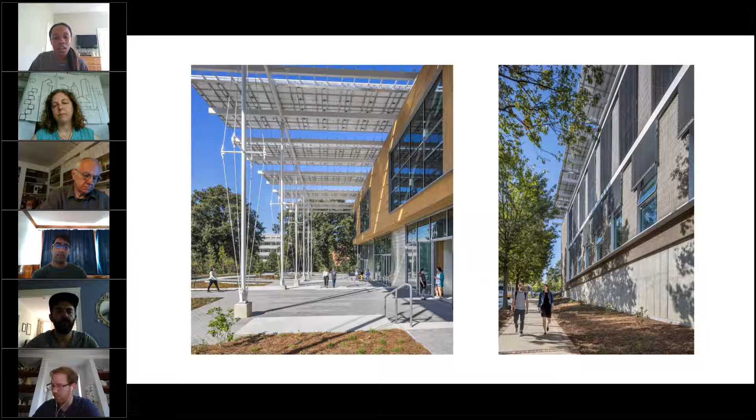A little bit about the Living Building Challenge, if you're not familiar: it's based on biophilic design, taking ideas from how a flower works in the environment - taking energy and resources from the environment, but also giving back. The Living Building Challenge defines a couple different markers that they want to hit.

Oh sorry, that's my home phone.

So there are a couple different markers they want to hit: place, water, energy, health and happiness, materials, equity, and beauty. Mass timber construction really hits on the material side of it and part of the equity side - I can talk more about the equity side if people are interested. That's probably what I know most about regarding the Kendeda building, but the mass timber part is really interesting too.

The Living Building Challenge really seeks to, instead of just being up to code and standard and sustainable, create positive environmental impacts - taking resources and materials that are brought in, but also giving back to the community around them, whether that's monetary value, programming, or the construction and the type of people working in and around the building, really helping to build the community.

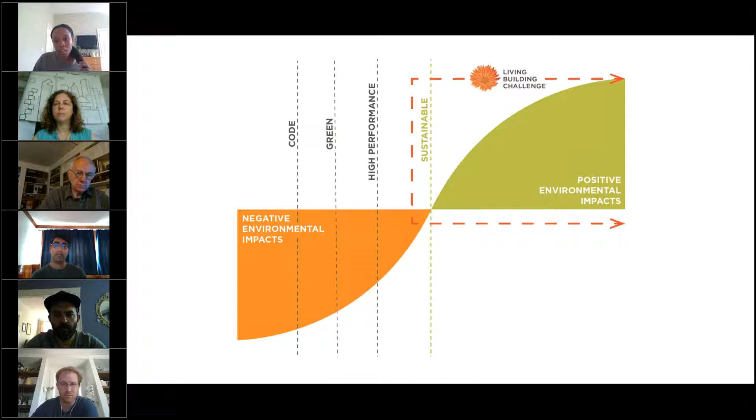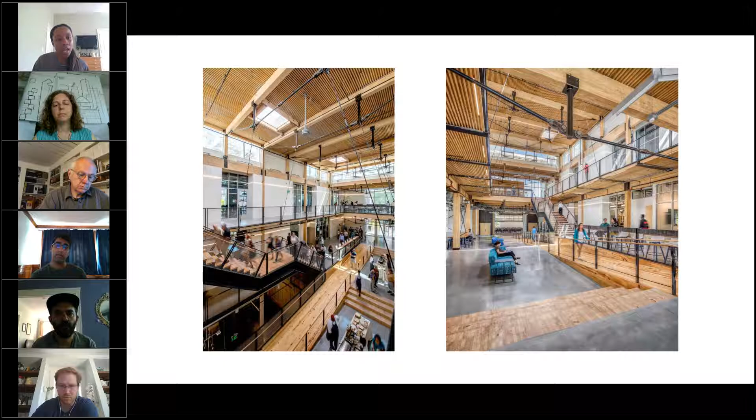Here are a couple pictures of the inside of the Kendeda building. There's a lot of wood - it's mass timber construction, and a lot of the wood pieces are reclaimed and recycled wood, which I'll get more into later. That was one of the imperatives the Living Building Challenge wanted to achieve - that a lot of the wood would be reclaimed or locally sourced.

And two other imperatives: responsible sourcing and living economy sourcing. They want to make sure the construction materials are local, brought in from a certain distance from the building, to make sure they're actually putting money into the economy and the community. Then living economy sourcing means the people actually building the building are local as well.

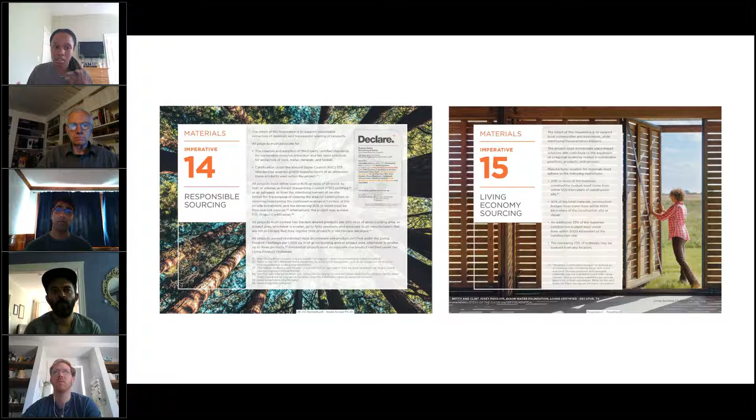So it's benefiting the community both economically and socially, and overall it suffices for the Living Building Challenge requirements.

The last imperative in terms of materials is net positive waste. This defines that at least one salvage material per 500 square meters of gross building area can be adapted or reused from an existing structure. For example, in the Kendeda building, Atlanta is a hotspot for a lot of film sets, so a lot of salvage materials come from the fast construction done for film sets. They bought wood from people in the film industry and used those pieces in the Kendeda building.

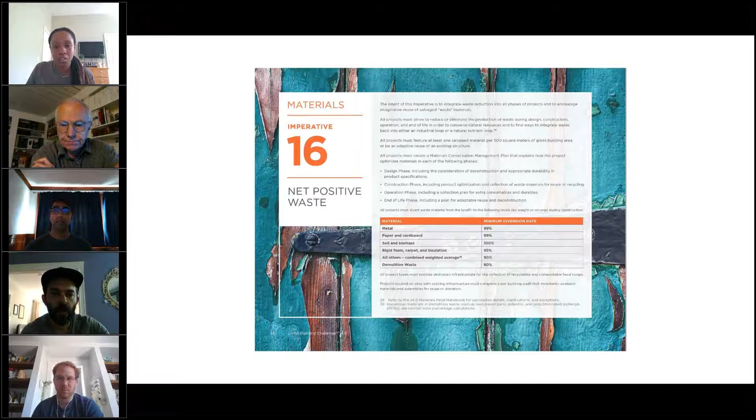These are a couple pictures of some of the construction work on the Kendeda building. They used horizontal and vertical glulam, with some steel and concrete structures for structural support, but most of the square footage used mass timber for construction.

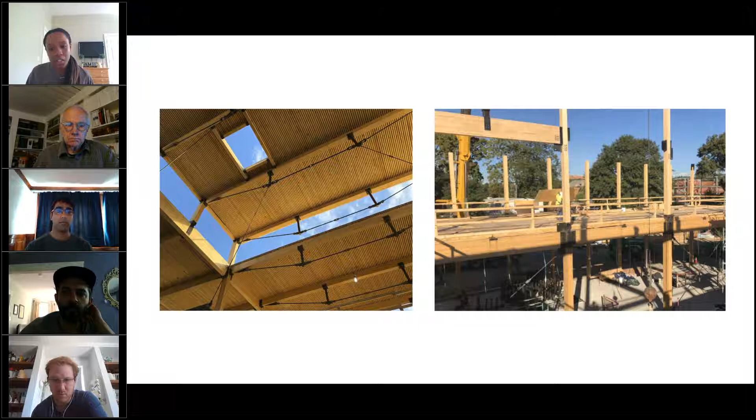A little bit about the cost and carbon impact: this diagram shows that concrete versus steel versus timber is a bit higher in price per square footage, but the tons of CO2 emitted is significantly lower than concrete and steel.

What's really interesting about the Living Building Challenge overall is that they understand that even though there's maybe more upfront cost with responsible sourcing, the long-term health benefits and active community and economic benefits outweigh the initial cost by a landslide. That's what they're trying to promote with mass timber construction in the Kendeda building.

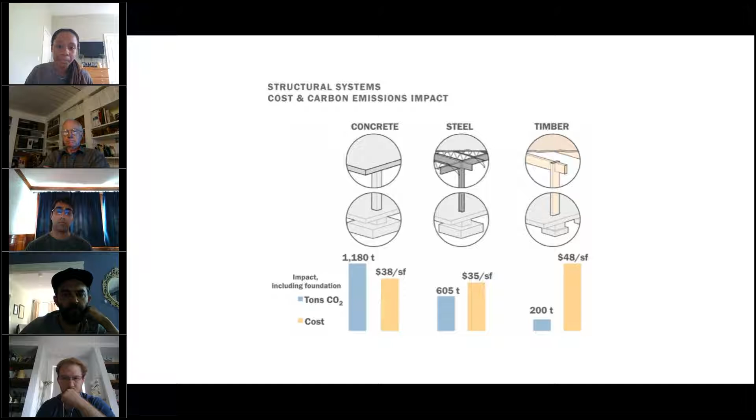So the structural engineers ended up making paneling from 2x4s and 2x6s, creating an interesting design that's visually appealing but also used responsibly sourced materials. They used FSC certified materials from local Georgia forestries, and the other 2x4s and 2x6s were salvaged pieces of wood from the Atlanta film sets.

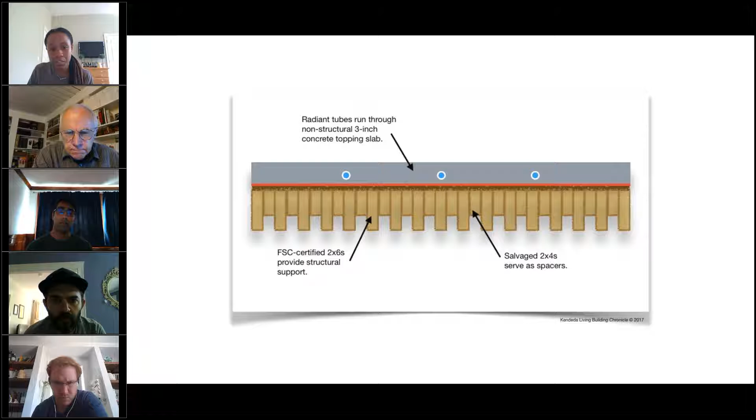Another interesting equity point: instead of using typical glulam construction, they had to nail all the boards by hand, so it was very labor intensive. They implemented a Georgia Works program, which allowed people facing homelessness or job insecurity to transition back into the workforce. They used that program to get a lot of manpower to help construct these things, which also promotes a different level of understanding and investment in the community.

So even though it's on what people would call a generally closed campus, a lot of people from outside actually had a hand in building the Kendeda building, giving them a personal connection to what the building stands for and what it's trying to achieve, promoting an equity component that not a lot of us think about.

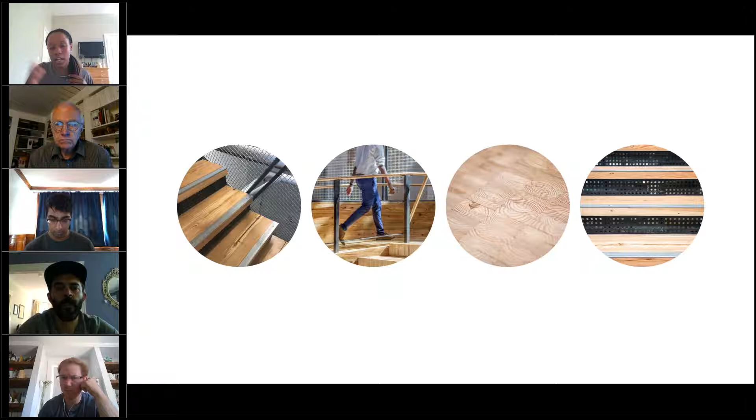The extra wood was salvaged and used - the bigger beams were used for staircases, there's a ramp as a main feature in the building, and a lot of the wood pieces were used as stairs, so you can see the facing and the wood grain throughout the building.

But yeah, that's all I have. I could talk more about the equity components or answer any questions anybody has.

Yeah. That's awesome. I think you should talk more about the equity piece - you were telling me a little bit about it. I think it's interesting. Yeah, of course.

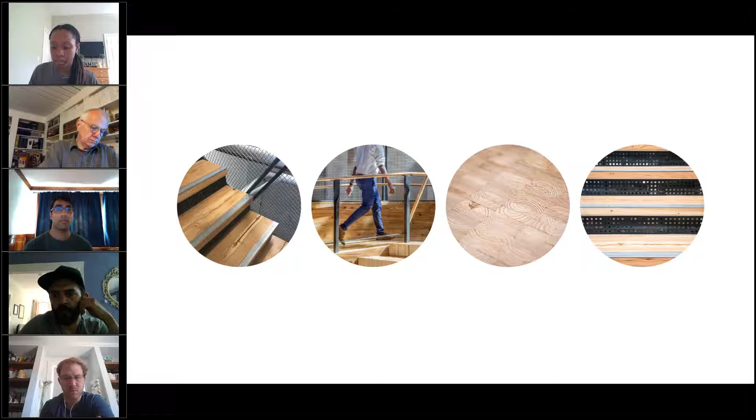So part of our research, we looked at what was achieved in terms of equity and what wasn't achieved. A big part they want to do, especially with the Living Building Challenge, is get everybody at the table early on - constructional engineers, students, professors, the designers, architects, everybody.

So a big part of the equity component was creating space for everybody, even though it is a campus and you would think we're going to have educational spaces specific to sustainable design. They really wanted to make sure it was open to everybody. So a lot of the classes held, they have petitions every semester to make sure the classes are large lecture classes. They get a lot of students who are in prereqs like general chem, general physics, so they can get a lot of students and foot traffic in and out of the space to promote this type of equity and promote interest in sustainability.

They also look into signage, so they could talk about and have other people understand the construction elements of it, what went into it, the people who built the building, that was really important to them. So the signage is not up yet, but they're working on graphics to put up.

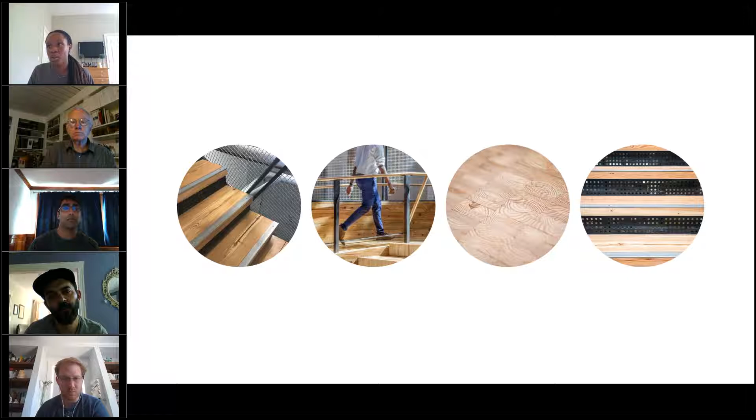But also just social media wise, they really wanted to promote that this is a building usable by everybody. So they wanted to promote the flushable toilets, the foam flushing toilets. A lot of people just come to use the toilets, and that brings a lot of foot traffic in and out of the space, which is really important in promoting equity from that side.

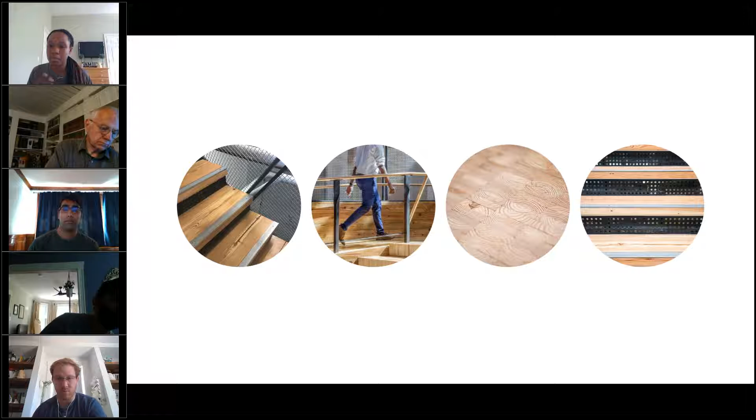And there's some setbacks from doing that. They want to make it more exposed to staff, it's not really that staff friendly, but they want to do more to attract some older and professional individuals. They want to do more scheduling for outside community partners. Right now they have a K through 12 program housed in there, so Atlanta students can come and learn in that space so they can feel like that space is their own as well. But some of that, they have a problem with scheduling wise, because it's a campus, they can only schedule one semester ahead of time. So that's something they have to figure out in terms of how to promote more diversity in programming.

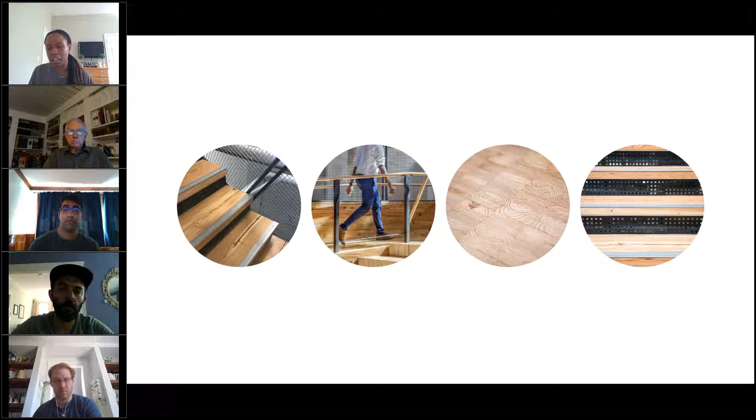And in terms of water equity, they use all the rainwater and filter it out on site, which prevents a lot of runoff, because Georgia Tech is a fairly hilly campus. A lot of runoff would happen into surrounding neighborhoods, so that prevents some of the runoff happening in those neighborhoods. At the moment, they're trying to make sure it can run without city water. Right now it's running with city water, so hopefully once certification happens, they can switch on and switch off whenever they please in order to achieve that kind of water equity component of the building.

So that means they're doing black water recycling. The foam toilets, if people aren't familiar with those, are basically composting toilets. It's like a regular toilet, but they have foam that runs down the sidewalls and primes it so that after you do your business, you just shut the lid and that's it. It sort of continuously flows, the foam. It's a bio-friendly product, and they have a whole composting system in the basement.

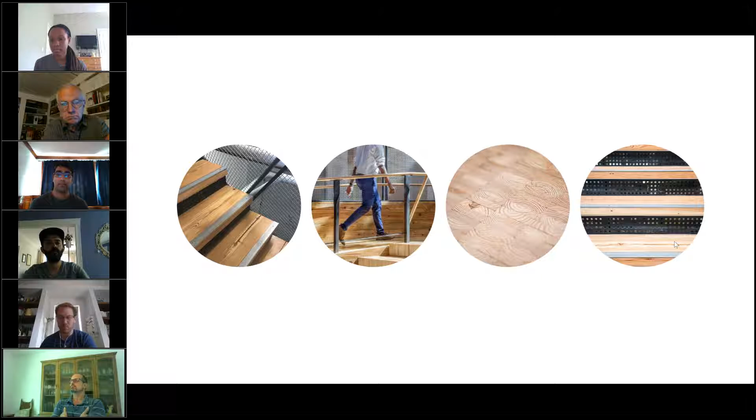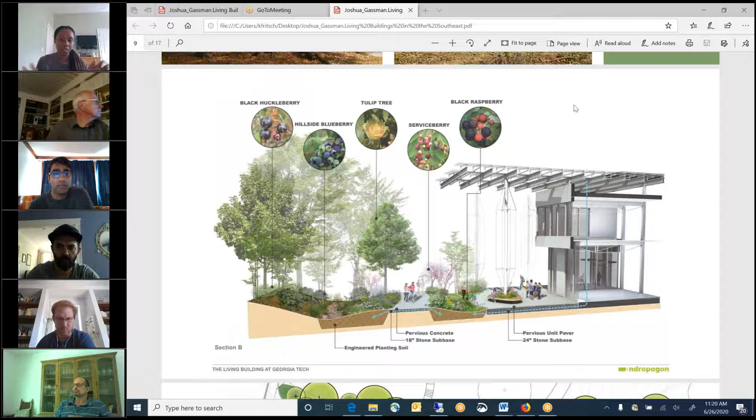In terms of the landscaping, in order to fulfill the Living Building Challenge requirements, they have to create an eco commons. So their master plan is to create an eco commons right next to the Kendeda building, and then throughout the campus to have more green space, but have these porous pavements so they can recycle more rainwater, because there's a lot of runoff, especially when it rains a lot.

It's very hilly, so having a way to take this water and use it for something else instead of overloading the stormwater systems. The solar panels run north-south in this image, and that's the porch. That whole plaza area to the north is the porch, and there's this huge existing tree that they worked around. Significant old tree, I think they show it there.

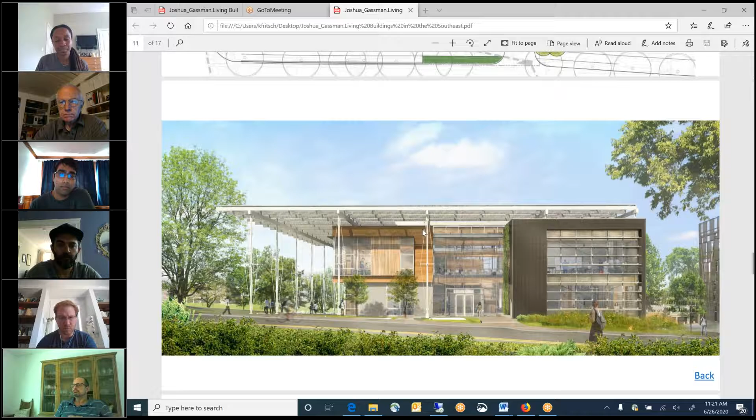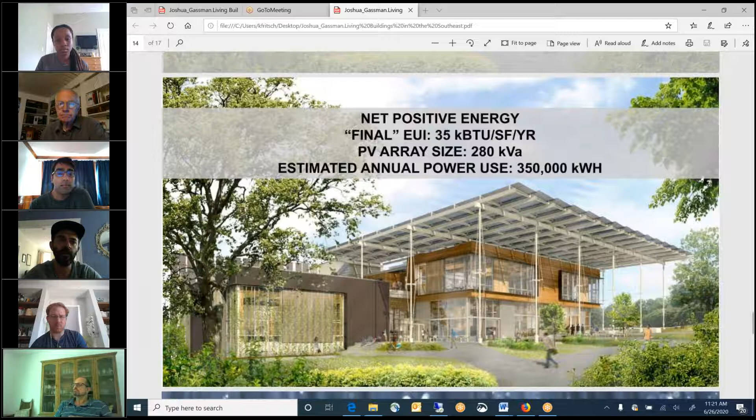Hey y'all, I have a quick question about the lamination process you were talking about, saying they had to change the adhesive when laminating boards together. Do we know what type of adhesive was used? That's a good question, I could look and see if I can find information on that, but I don't know what type of adhesive was used.

Did they just nail it, or did they do both? So they just nailed it. Oh, I thought it was an adhesive that they used. No, they weren't allowed to use adhesive because it was a red list item. So they ended up nailing all the boards together to create that pattern with the 2x4s and 2x6s. Got it, thanks for clarifying.

Another interesting thing is one of the petals requires you to grow food on the site. So they have a roof garden that has some kind of berry, and I can't remember what else, Jordan. Yeah, I think there are blueberries and other types of foliage. I don't think there are any other fruits, but I know there are blueberries up there.

Then this is a green screen they have, and behind that, this huge volume is the large classroom. It's flat seating, tables and chairs sort of venue, but you can also set it up as rows of chairs as well. It's not a stepped format.

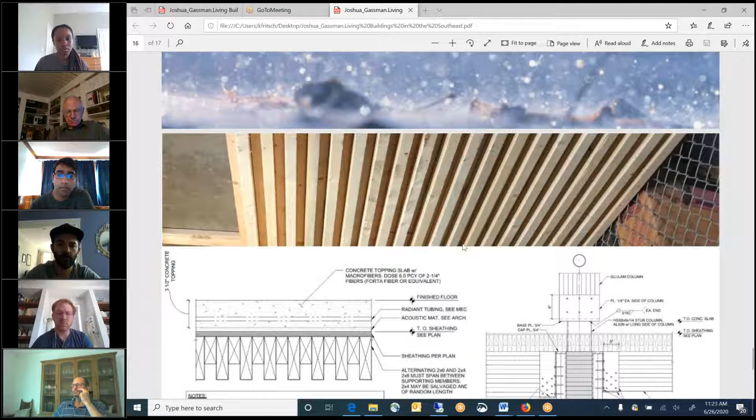So is it completely powered by the solar panels on the roof, or is it still drawing back? Yeah, I have a slide on that. So it does have to be net positive. You go through and reduce your loads as much as you can, and then they're supposedly going to be neutral, right?

Sometimes the living buildings in general end up creating more power than they thought, or using less than they thought. But I think, Jordan, they still have quite a few months to monitor. They have to monitor for at least a year, right? Yes, correct. So this is the goal, their final EUI is 35, and hopefully that will match their output.

It's pretty well daylit, so I can't imagine there's a lot of energy use in the building in terms of labs or equipment. It's pretty minimal. Their classrooms are all daylit. And I think naturally ventilated too, right? I think, but the humidity is an issue.

I can't remember about the windows systems, I'm blurring together too many buildings. Is it a radiant slab everywhere, or is it just in those sort of elevated decks with the concrete?

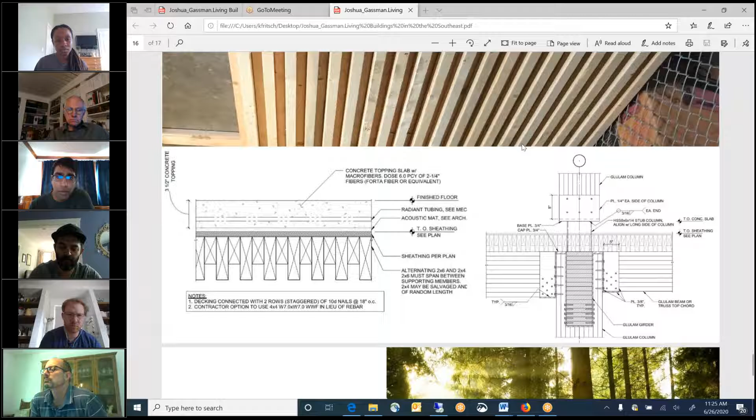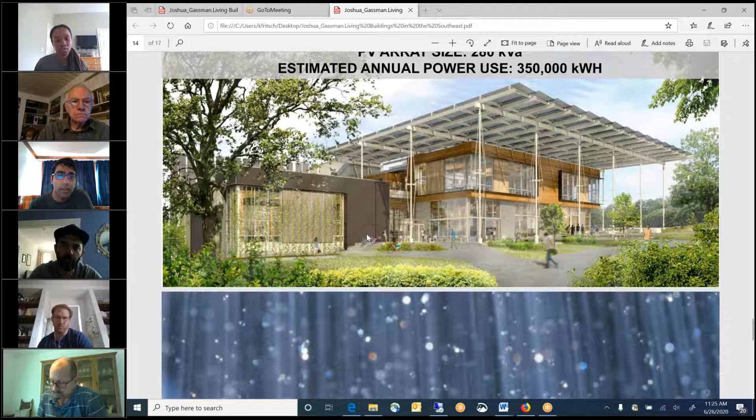So what I learned is these are their classrooms on either side of that atrium space, and offices and classrooms down here as well. That's all radiant slab. This one big classroom volume is a different mechanical system, it's forced air from the top. And I think because it's slab on grade, I can't remember the reasoning why, but it was a different system on purpose.

It might have been the load. Actually, you know what it was? I think it was the ventilation requirement for the amount of people in the space. They had to have a different system anyway, and I believe it was a heat pump. I can't remember, but there's a huge fan in the ceiling that they blocked out. It's kind of an interesting detail, but I'll have to look up more information on that. I do remember that it's a different system.

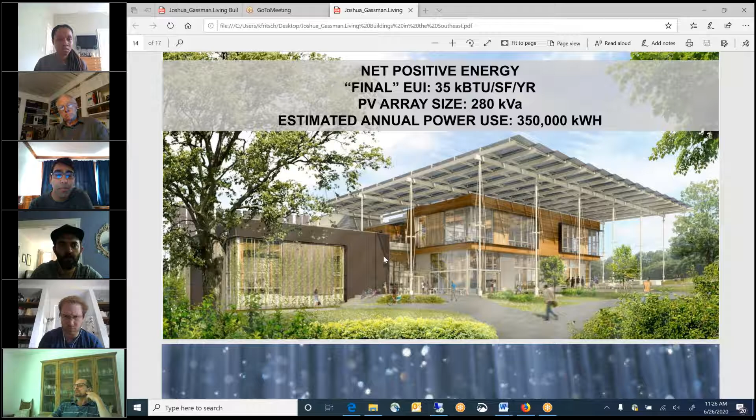So when they submit this as a Living Building Challenge, it's two separate buildings kind of like that, but it's probably really just one project, and they're kind of using the two. Well, it is very connected, it doesn't feel like it, doesn't seem like two separate buildings, and you often have zoned mechanical systems anyway.

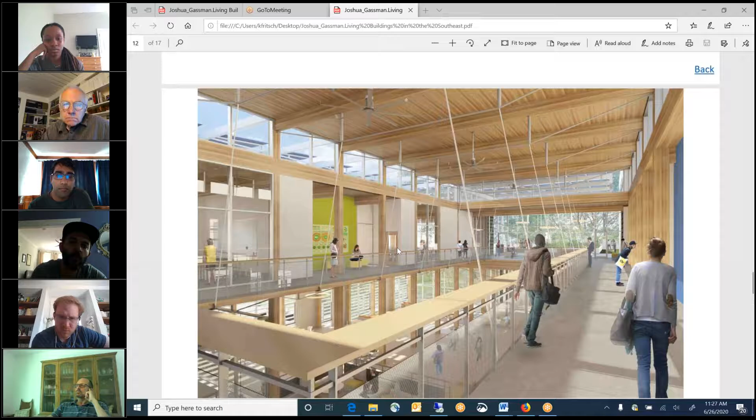So it's all one envelope, right? That classroom opens up to this hallway space. I don't know if they have an image of it, but it doesn't feel as separate as it looks in this picture. It's just basically one story, right? That's the whole classroom, and it has a movable wall in it, and it can open up to be more of an event space.

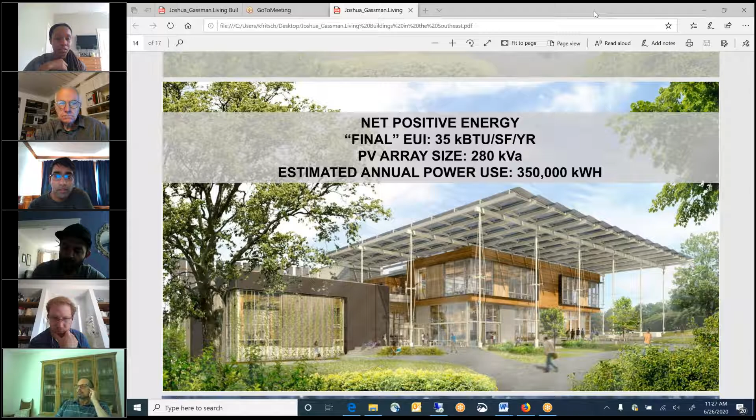So did this building get the full petal thing, right? The whole flower, basically? Isn't that how the Living Building Challenge works? Yeah, so they had to meet the requirements of all the petals. It was actually built under the 3.1 standards, not the 4.0 standards for the Living Building Challenge, so they didn't meet some of the new requirements that are in the 4.0 standard.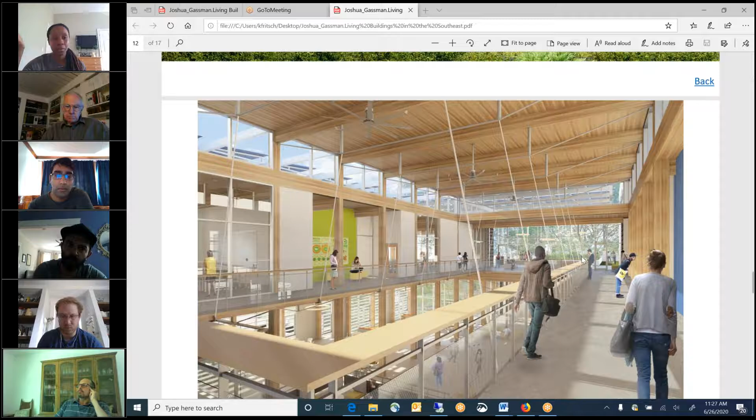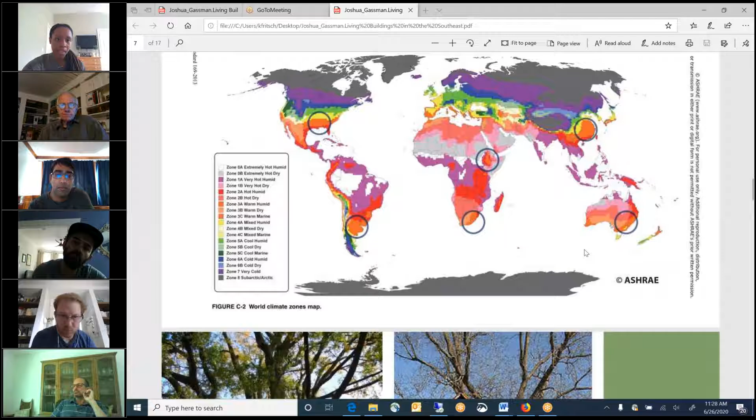For example, for the equity component, there's a requirement that they have to donate a certain amount of money to a nonprofit promoting equity and sustainability in the community. And since Georgia Tech was considered a nonprofit at the time, Georgia Tech didn't have to fulfill that part of the petal, but now they got rid of that in the 4.0 standards. So now everybody who builds a living building has to donate a portion of the money to a nonprofit promoting equity and sustainability in the community.

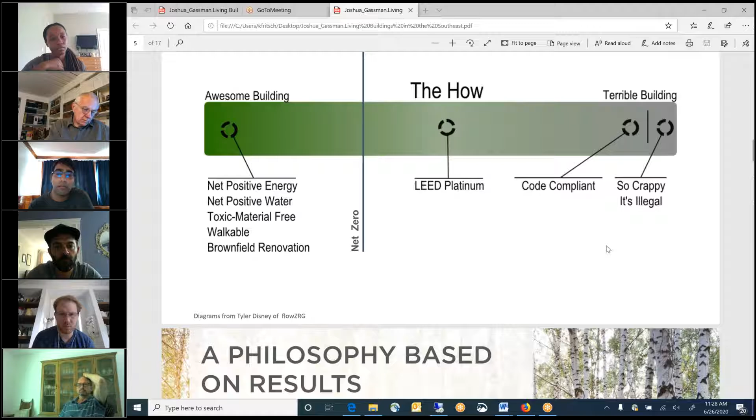Interesting. And these slides were put together by the architect for a 5-minute presentation, so it's kind of interesting. It was Lord Aeck Sargent, I believe they're out of Atlanta. But this partnership is pretty unique.

The Kendeda Fund itself designated that they wanted to do a living building, much like the Bullitt Center was specifically a targeted example to the community of sustainability, and that's what the Kendeda Fund wanted as well, and wanted to connect that to Georgia Tech, or the whole wider community, right, and the engineering architecture school.

These consultants too, Andropogon, they're a pretty progressive landscape architect. If you haven't heard of them, they've been doing this kind of great natural habitat work for a long time. And then Biohabitats also does a lot of consulting on that sort of work as well. So that's kind of all we had.

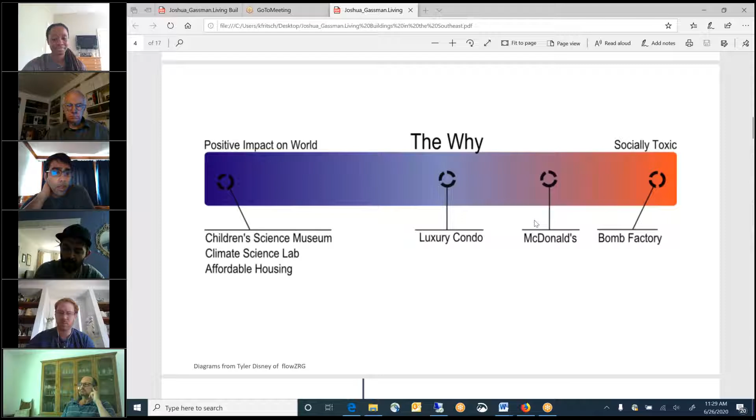So is it like a partnership that's kind of separate from the city of Atlanta? Like it's just their own sort of partnership? When they partner with the community, do they go to Atlanta, or do they just kind of go to community groups, or how does that work? Or how did it work?

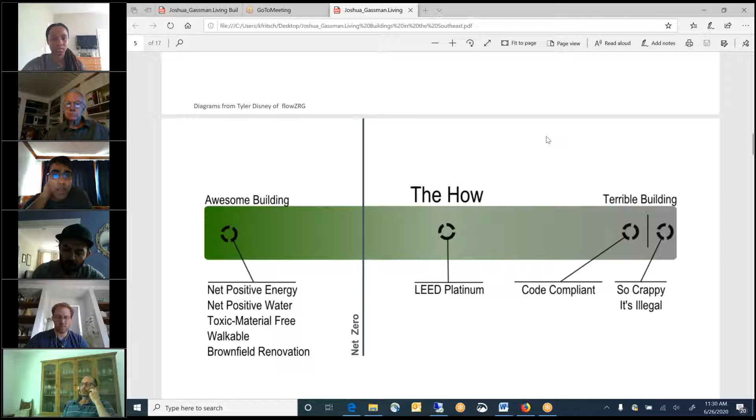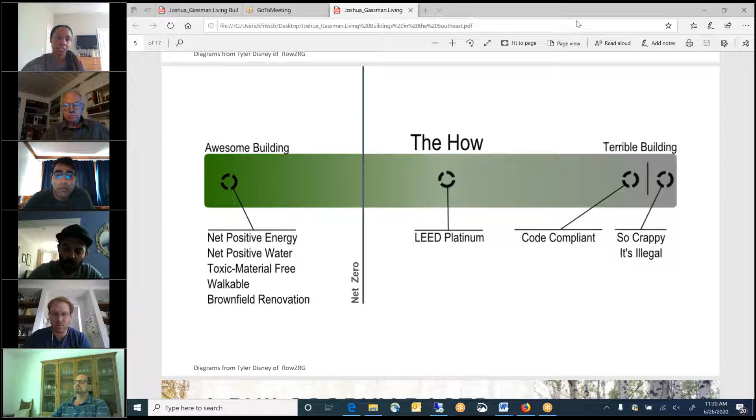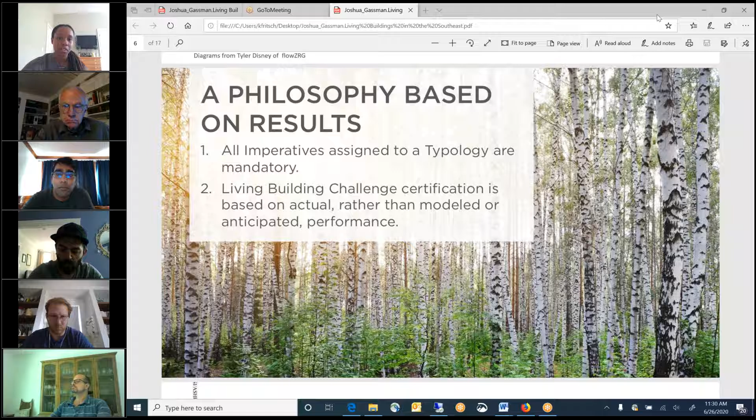My assumption is that they just partner with other community groups. I don't think they partner with the city as often. I know they had some relationships, so they developed an equity petal work group for the building to fulfill the Living Building Challenge standards, and the equity petal work group partnered with Partnership for Southern Equity, which is a nonprofit based in Atlanta. I think they did have some people that worked in the sustainability side of the city of Atlanta, but it's not a direct partnership like that.

Yeah, I think that makes sense because Atlanta is just a very limited piece of that whole area, like Metro Atlanta is a lot bigger than that, right? Right.

Cool. Well, thank you, Jordan, for presenting. Oh, go ahead. Yeah, I was just going to say Jordan was talking about how she was involved as vertical - well, you can explain it better, Jordan. Yeah, I think it's pretty cool that you're so involved with this project.

Yeah, so it's a vertically integrated project. It combines professors and people in that general field, and then other students from other majors. There were 2 design majors, engineering majors, public policy. So it's basically coming together and thinking about, okay, what is building and what is equity, and how can we promote equity and sustainability in the built environment, translating that into either a larger scale in Metro Atlanta or a smaller scale, just our Georgia Tech community campus.

So I'm specifically working on a project to promote equity and sustainability in capstone engineering projects, developing guidelines to have people think of engineering projects not just as something that they can tack on at the end of the project, but something that should be communicated throughout the whole process of designing.